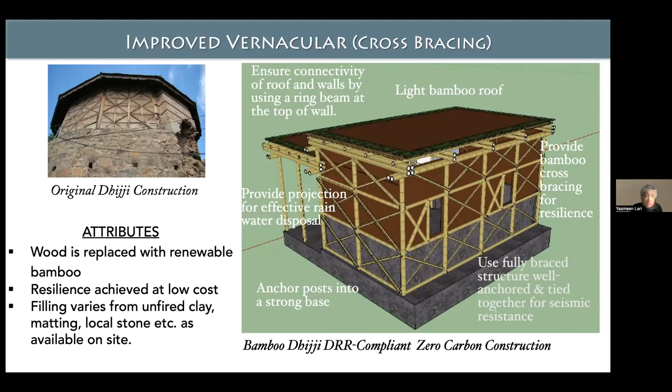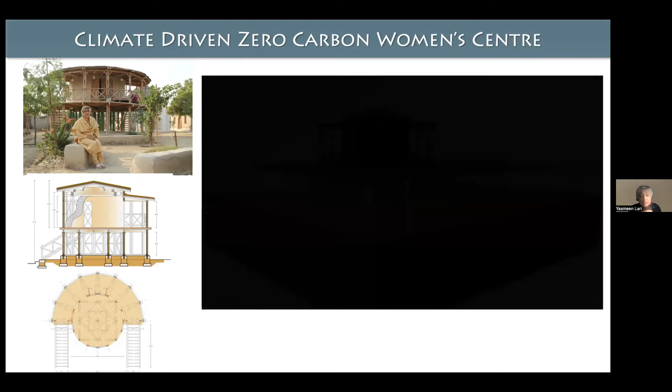So this is a zero carbon center, and as you can see, it has survived. This was built in, I think, 2010 or 2011, and so it's really lasted pretty well all these days.

And now let's come to tenet 3, which is delivery of unmet needs through the Barefoot Incubator. This is a place where we train everybody in how they can build with green skills and locally sourced materials in a safe manner. And the incubator also trains in income generating activities, which are again based on low cost or really no-waste materials.

So now there are examples of how we deliver. I'll just run through these slides. This, for instance, is the zero carbon safe one-room house. And these are the primary needs, I feel: the shelter and the toilet.

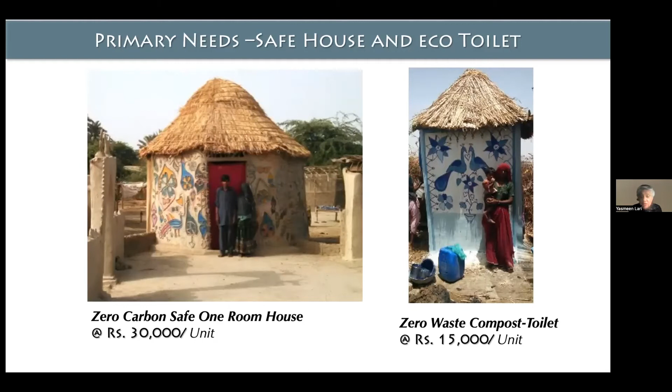And they're simple bamboo prefab panel structures, which I'll explain later in more detail, which are then finished with earth, stabilized with lime renders, and decorated to express pride and identity, because you can see that they decorate them themselves. So this shows how much they take pride in whatever they have built, but they've really built it themselves also. And this is very, very safe and very, very strong.

And this is the Pakistan Chulah stove, cooking stove, which has won this World Habitat Award of 2018. And it has many different attributes, but the best is that it doesn't get, of course, washed away during floods, but also it has raised the dignity of women, because now they are no longer crouching on the floor, but they're actually sitting up straight, and they're serving their family, and it becomes a social place. It's just an earthen platform. It's very, very inexpensive, and it's all self-built.

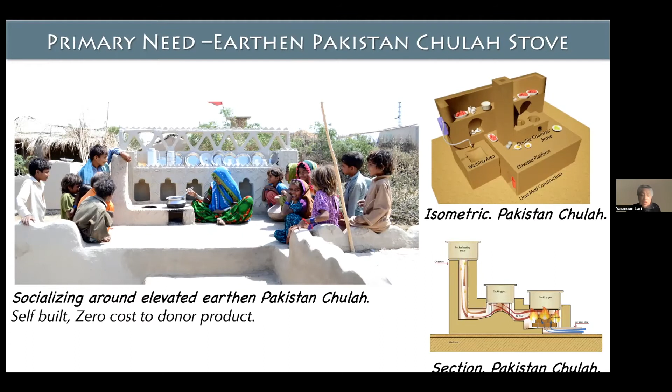So this is the beauty of the scaling up with the Barefoot system, or with the Barefoot ecosystem, because there are just so many of them. And if there's affordable products, if they are safe and good products, they will invest into that. And the field is just enormous, and everybody can become a millionaire who provides any of these, like shelter or toilets, or the stoves and everything else. So this is the way.

All right, so now we come to tenet number 4, which is non-engineered structures for shrinking the ecological footprint. So I just wanted to share with you the damage that's being caused with present day construction, the way we are building. You can see these are UNEP figures. 40% of world energy is used, 16% of water, and waste and all kinds of things. So we need to be really looking at it. Why are we building this way any longer? We should not, because we cannot reach that 1.5 degrees Celsius rise by 2030, I think it is, if we continue to build in the way that we do. So all of us must be very mindful of what on earth is happening.

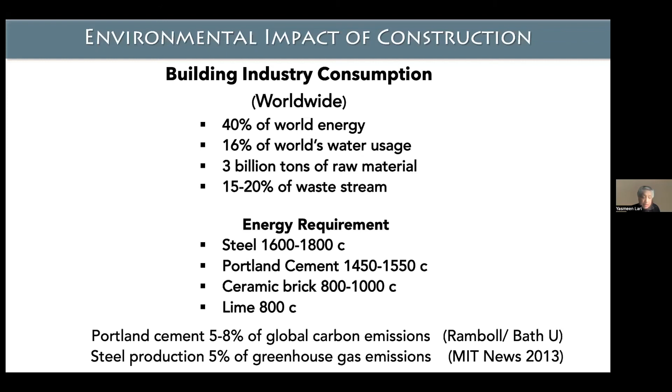And then I just wanted to show you, these are the international models. On the left are about 150,000 rupees, which, I can't convert, but when we build it, it's something like 1/5 of this kind of cost. It's burnt brick and steel girders and all kinds of urbanized models, which are not at all relevant to the situations. And this is really like the Western charity model, where international and other organizations destroy initiatives of target communities by treating them as victims who must subsist on handouts.

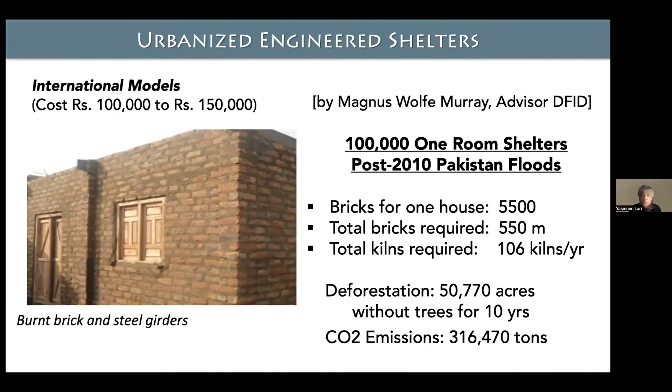And the models they give are so outrageously expensive and totally inappropriate, so obviously the costs are very, very high. So this colonial mindset among non-state actors such as international and national aid agencies, as well as state institutions, promotes a culture of dependency rather than fostering empowerment and self-reliance. And on the right, you see the slide which shows how much destruction goes on when you actually just fire bricks, how many acres of forest land you destroy. So we should be careful as to how we do that.

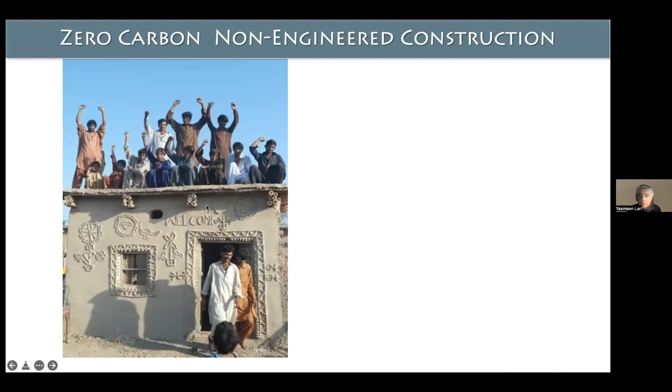And then this is a zero carbon non-engineered construction, which I thought I'd show you. Now let's see, why am I not getting it? Yeah, on the left, of course, is the house that we built. Something like 45,000 of these have been built. And, sorry, let's see. So from 2012 to 2014, we were technical partners of IOM.

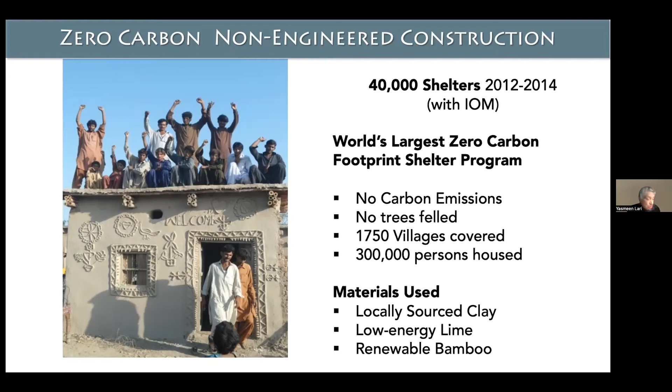And this is the world's largest zero carbon shelter program. As you can see, there were no carbon emissions and so on. There's just so many good things about this that we really did not do any damage to the planet at all with all this. So, and then let's go to the other one.

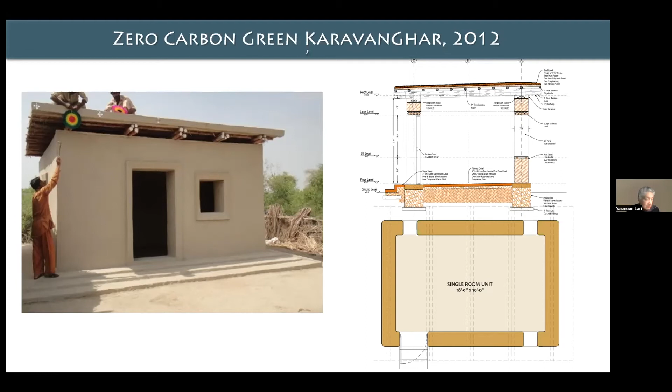This is a similar kind of house. Again, this is just earth masonry walls with lime stabilized, earth stabilized lime plaster, and the roof is all bamboo. And as I said, this is part of the 40,000 that were built. And then similarly, it's the same design, but you can see that every one is different because every one is then decorated in a different manner.

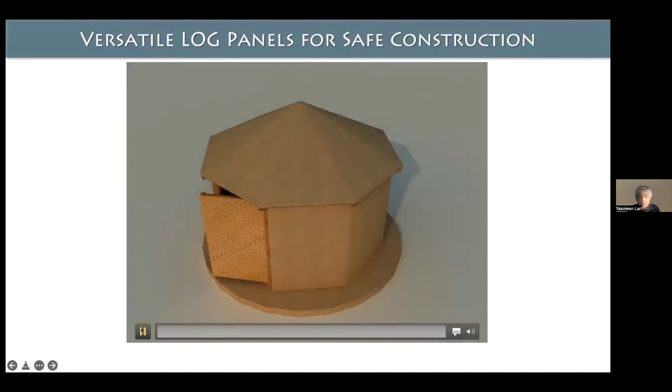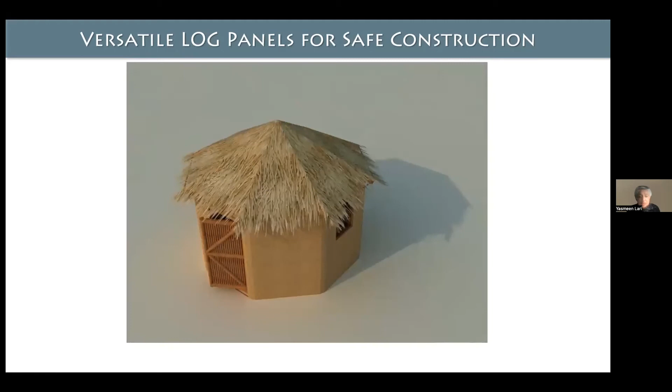And what basically you do is you take these pieces and you put in the cross bracing, and you make eight of these panels that you put together. And the roof is like an umbrella that also fits in it. This is also prefabricated, and you finish it off with thatch on the roof or whatever you want, and so on and so forth. And then the same thing can be expanded. If you add on 2 more, it becomes a classroom. The same panel technique goes on.

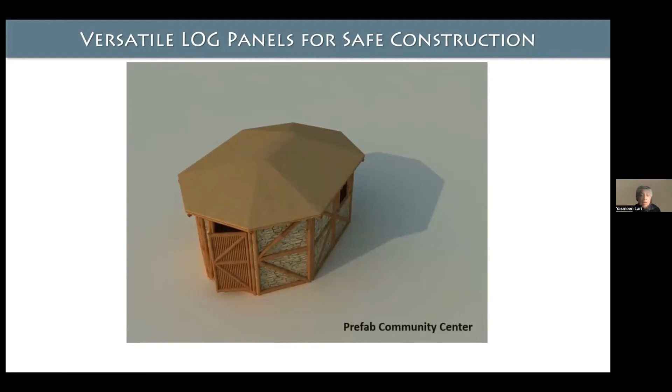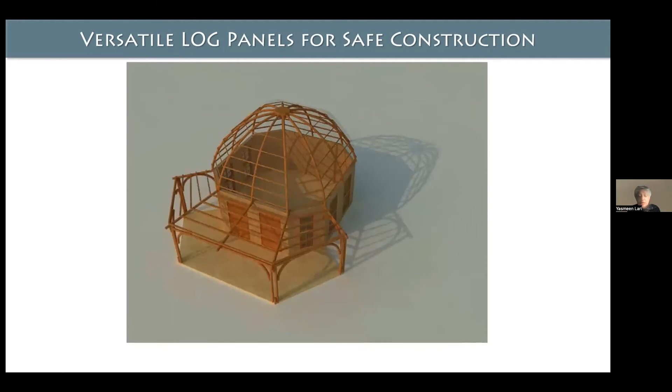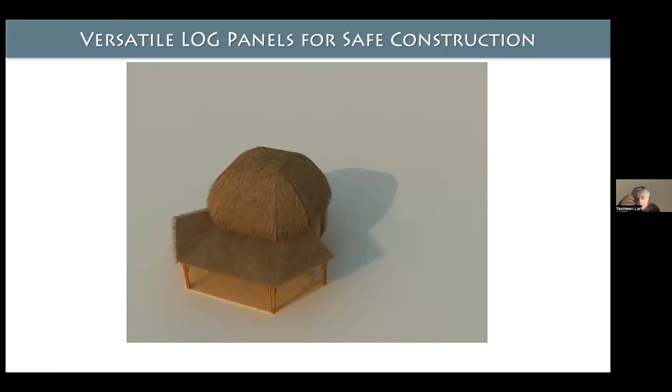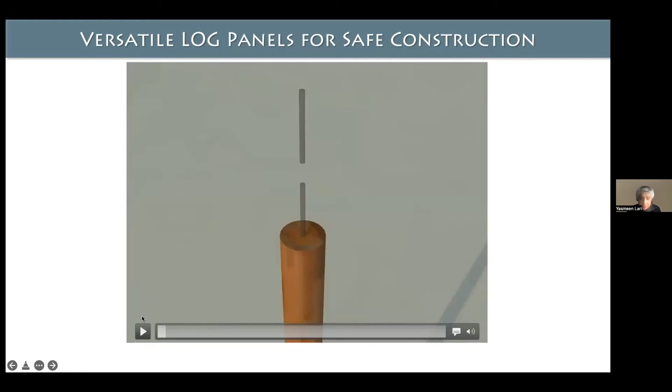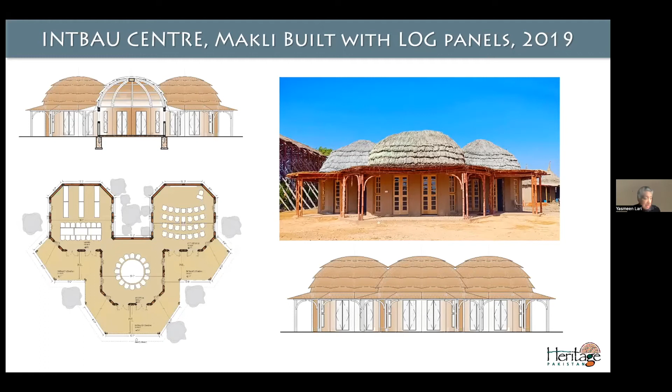Now this, I just want to show you how the modules can fit together with each other. And then you can make much larger centers, and you can put in any number of these together. And the same system goes on, which is very, very easy to fabricate. And you can do it under supervision, so you know that the quality will be fine. And this is how we train people to do these things. This is the same system of prefab panels.

This is my ZC3 or Zero Carbon Center, which is our training place as well. And we hold international conferences here as well. This again is all bamboo. And it's quite a huge structure actually, the largest bamboo structure in Pakistan. And we use it as a training place. So there are lots of people who are working and making things. This is for their livelihoods. And similarly,

when you have international conferences, this was held in 2019. We had something like 30 delegates from abroad. We had another, I don't know, 100 or so from Pakistan, and we held it all in this particular place, and it worked pretty well. So you can see it's a very airy, open space. It's really very simply done, and it is airy, and climatically, it's very, very appropriate.

I just thought I'll show you that we're doing something with an urban situation as well, again using the same panels, and we can do incremental housing. So there are lots of possibilities, even at the lowest level. But I mean, if the star architects used bamboo, they could do something spectacular. But my work is really with the poor. So I'm trying to see the lowest possible cost construction.

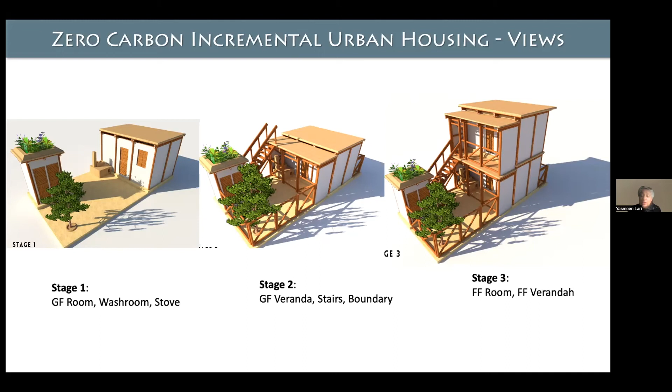Because today the levels of homelessness and poverty in almost all countries are now alarmingly high. So in Pakistan alone, at least over 1 million impoverished households are without primary facilities of safe water, shelter, sanitation, or clean cooking arrangement. I mean, there's nothing there for them.

So as we do not have any expectation from government or from UN and other donor agencies, whose siloed Western charity model in any case is not sustainable nor acceptable, I decided that as architect for the poorest of the poor, I'm honor bound to provide easy access to technical guidance to the marginalized for building safe DRR compliant structures themselves, so that people are able to do it themselves.

They don't wait for anybody. And for this reason, my colleagues and I at Heritage Foundation of Pakistan have worked hard to develop over 24 video tutorials teaching green skills and zero carbon construction. It's all about that. These are open source graphically illustrated videos and have been uploaded on YouTube, the Zero Carbon channel that's after my name, to enable even non-literate households to take up affordable construction using locally sourced sustainable materials.

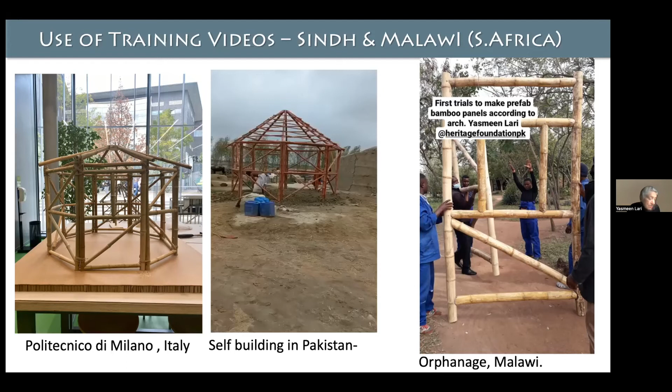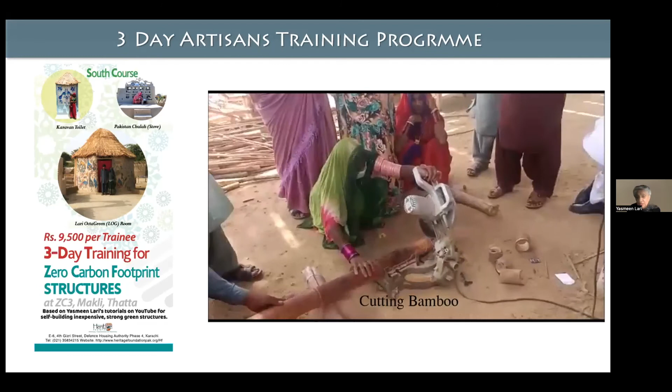Oh, sorry, I think there's one more slide that I would like to show you. This is our training program for our rural areas, and you'll see how even women are taking part in this. They're all rural women who are not really even literate, but they are able to work and learn and do these things. All of these really are non-literate people, but they're the ones who most need this kind of housing, and they're learning to do this, and they've gone back and started to build.

And this is what I want to do somehow, is to reach out to everybody that wants to do it. And it should be affordable enough that they can do it themselves, so that they don't look for any funding from anybody else and are able to entirely do it themselves. So this is all drawing upon vernacular traditions, and people can be trained; we have seen that.

So the self-building and co-creation techniques that are being imparted through our video tutorials are enabling the vast majority who usually have no access to technical and financial assistance to build their own housing that is safe and climate resilient. Thus, in order to reach the majority of the disadvantaged populations, application of BASA, or Barefoot Social Architecture principles, is essential, through easily applicable low-tech techniques helping the poorest of the poor to rise above the vicious circle of poverty and dependency.